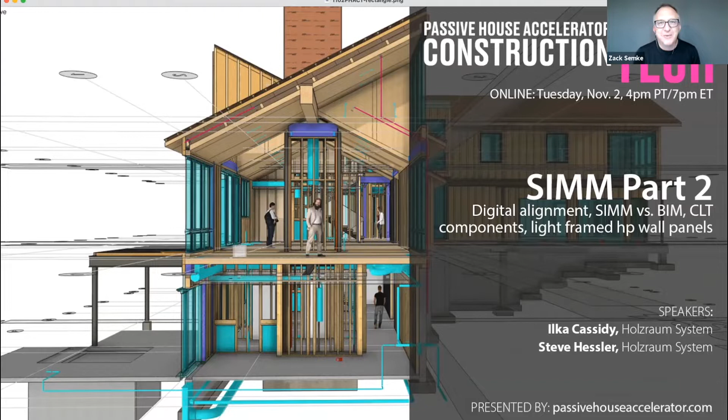Thank you so much, Zack. Really looking forward to tonight. You're in for a treat. If you haven't seen Part 1, we'll let you go now and go to YouTube and check that out. Actually, I wasn't supposed to say that. So backing up, stay with us. If you haven't seen Part 1, it's okay.

So SIMM, right? It's the single integrated manufacturing model. If you're working with someone that's not familiar with that term, please show them this clip, then they'll be familiar. We're really blessed with the run-through we had with Ilka and Steve. We skipped the presentation altogether and just hung out. We got together and talked about what we do and how we do it. So tonight we get to see this for the first time, just as you are. We're going to have comments, you're going to have questions. When those come up, share them with the rest of the audience, because someone else probably has that thought, that comment, or that question. So bring it forward and let's engage.

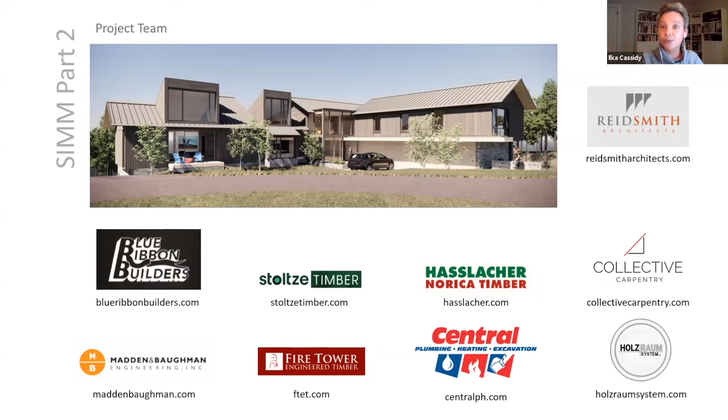This is us. I'm an architect, CPHC, and energy modeler. Steve is also a CPHC, a structural designer, CNC programmer, and high performance builder. And David is a biologist and software designer. I like to introduce us to show that we are coming with a pretty diverse list of backgrounds, which explains to some degree why we are doing what we're doing.

Holzraum System works early on with the project team to align all perspectives with factory-specific construction and prefab preferences. The goal is to coordinate and translate design intent into what will be fabricated and assembled.

We are independent and partner with several manufacturers, and because of that, we had to develop a communication strategy that is actually universal in terms of manufacturers' outputs, as well as a tool to communicate and collaborate with all stakeholders. We call this tool a single integrated manufacturing model, or SIMM.

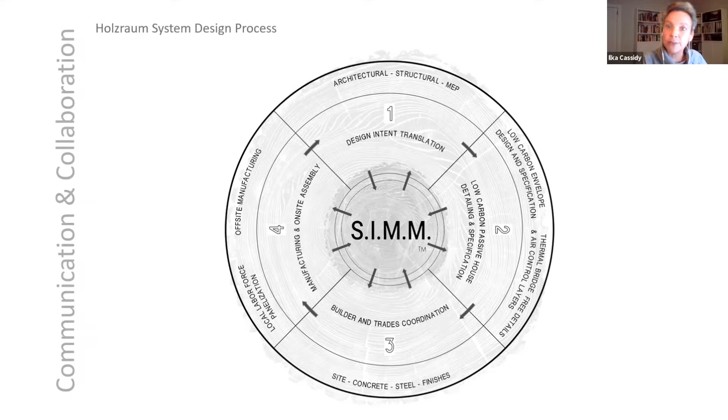The SIMM actually develops into a production fidelity SIMM model and generates panel shop drawings or machine file outputs, as well as raising and installation instructions. The outputs can be used by local labor force to build panels by themselves, or by highly automated factories. Either way, we are part of the team from design development to the end, to installation of the panels.

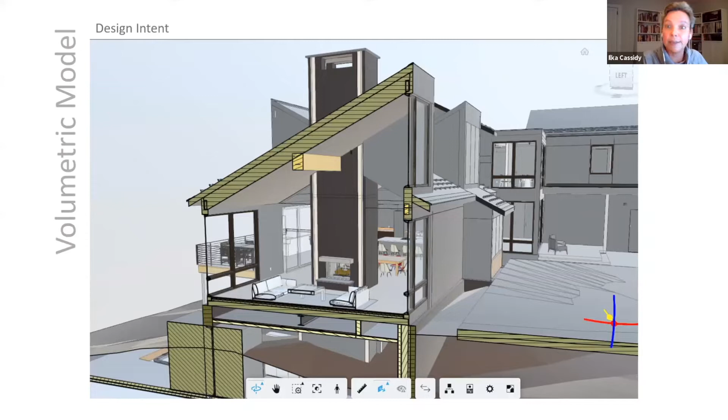To explain this a little further, here is the Revit model that we got from Reid Smith Architects. As you can see, it's great at showing design intent, convey basic construction strategies, and explain spatial relationships. And it is a volumetric model.

These are the outputs from a volumetric model, and they are really great for documentation of plans, elevations, sections, window and finish schedules, and lots of other things. So Revit is great for the architect, right?

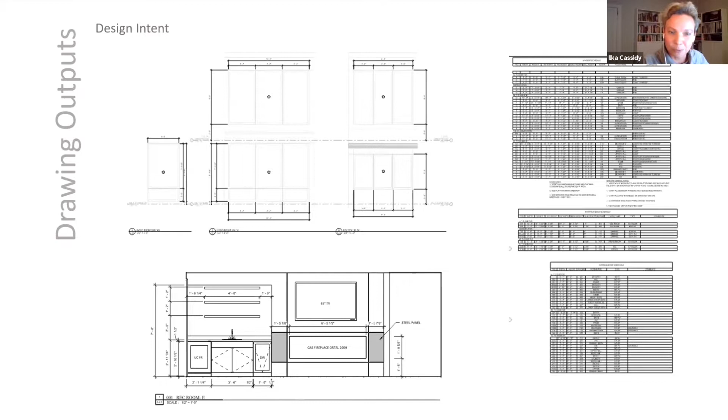And engineers as well. A SIMM, on the other hand, is an expansion of what you need to manufacture the panels. So it's a precise parts-based production model.

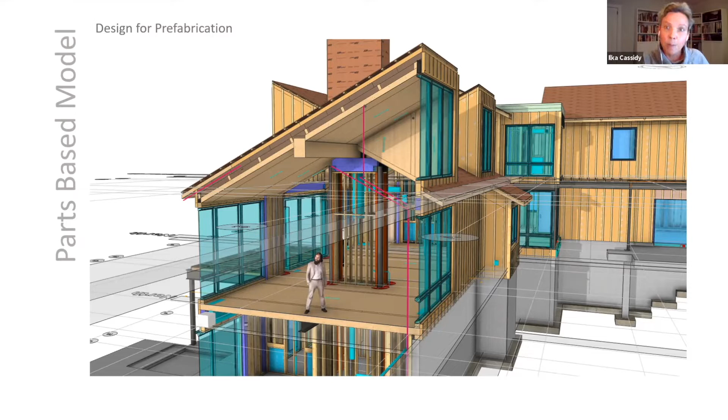In a production model, every element that makes up a panel needs to be identified, modeled, and organized in order to generate these outputs like 2D geometry review set, site prep coordination drawings, installation drawings, panel shop drawings, and in many cases, machine files.

We started thinking that there's just so many lost opportunities in just using this parts-based model for production, because you have to build this model for production. Otherwise, it's not going to work.

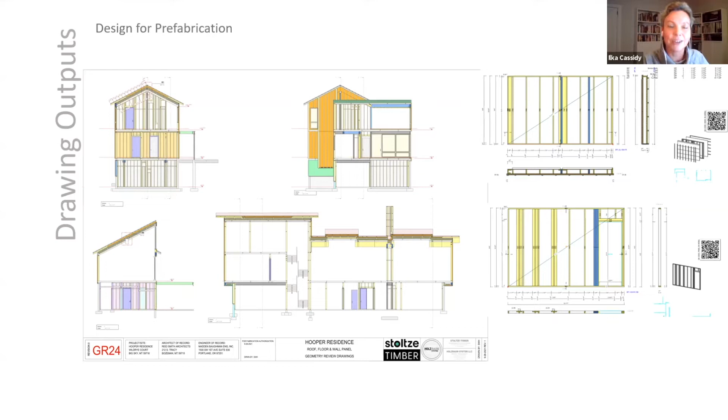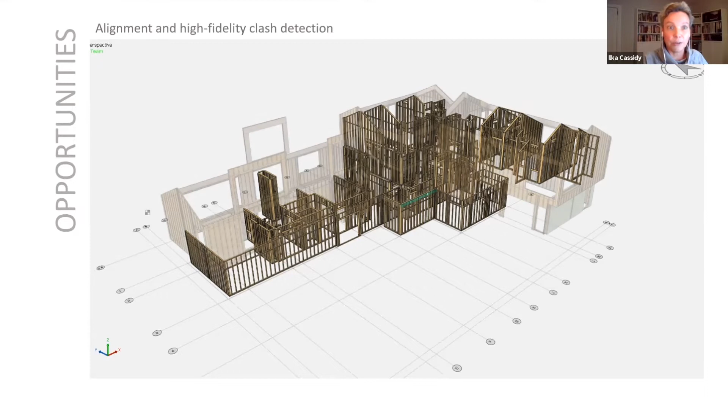So you have this, and this is what typically would be modeled by the manufacturer. In this case, the interior walls, the exterior walls, floor panels, and roof panels.

But since we know that what is being built in the computer will be built exactly according to instructions in real life, we started to include other perspectives.

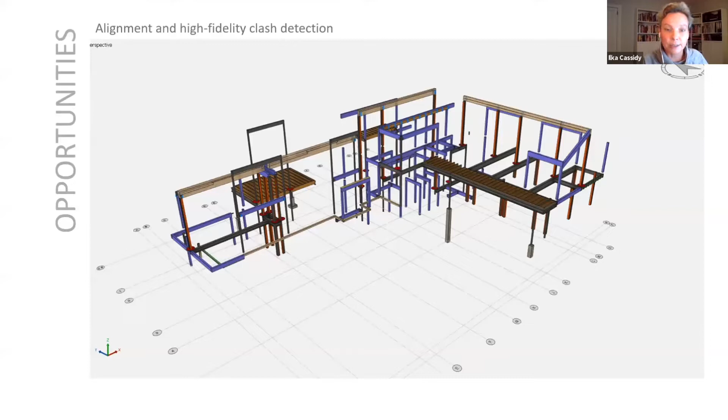So this is the load path, and the Revit model of this was actually provided by the engineer with correct sizing of the members, but it needed to be organized and integrated into the rest of the model. And the same is for the foundation.

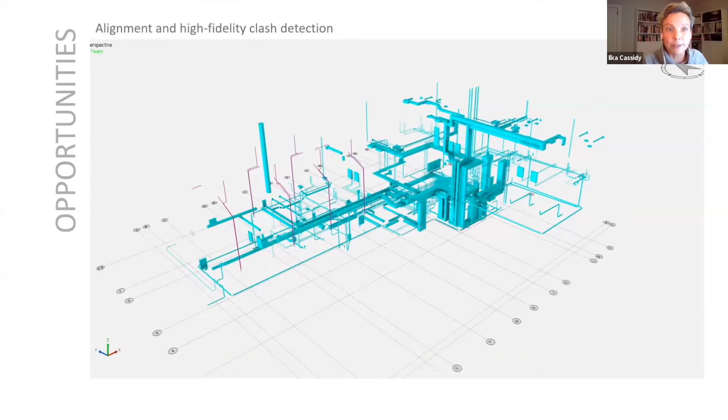The MEP model was also provided by the engineer and could be integrated and clash detected. By kind of running through this with all the other elements, we can check against everything that's being built.

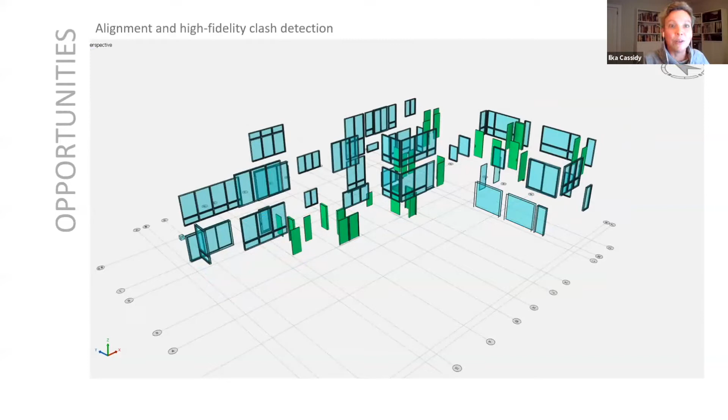And then we also add windows and doors, and this actually came out of the architect's Revit model. We work with the architect builder to integrate them and really detail them out. And this is what we call a holistic parts-based model.

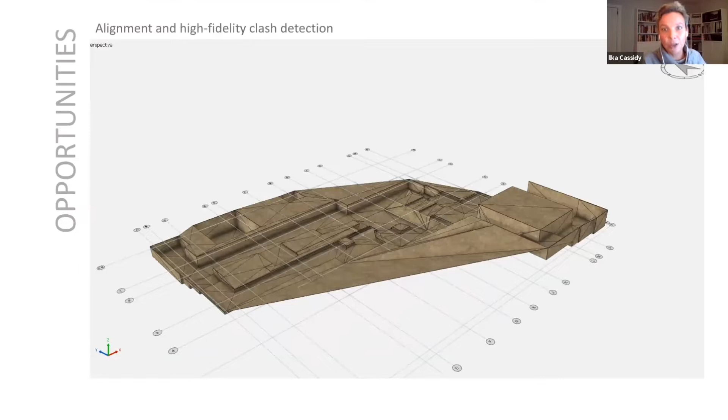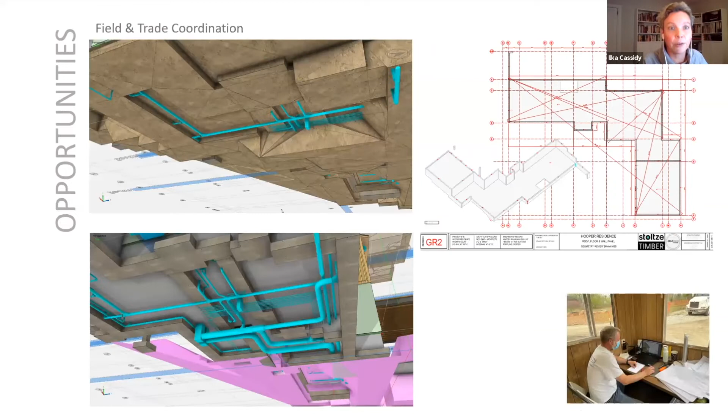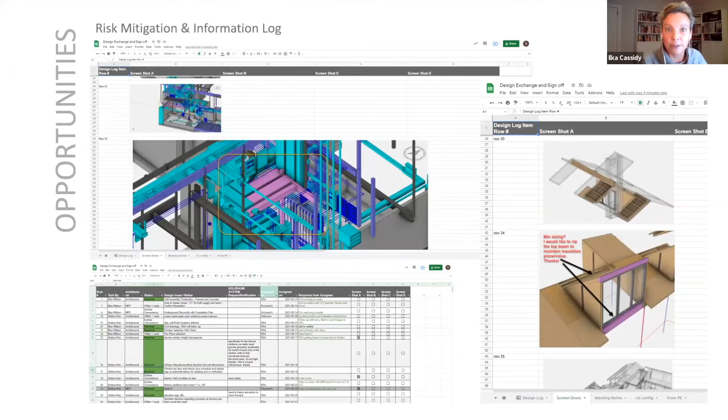In this case, we also were asked to integrate the terrain model, which was provided by the excavation contractor. So we started using the SIM as a communication tool for field and trade coordination, for high performance envelope detailing and instructions. The SIM basically becomes a visual database that feeds an information log, and it has endless possibilities to attach data to each part.

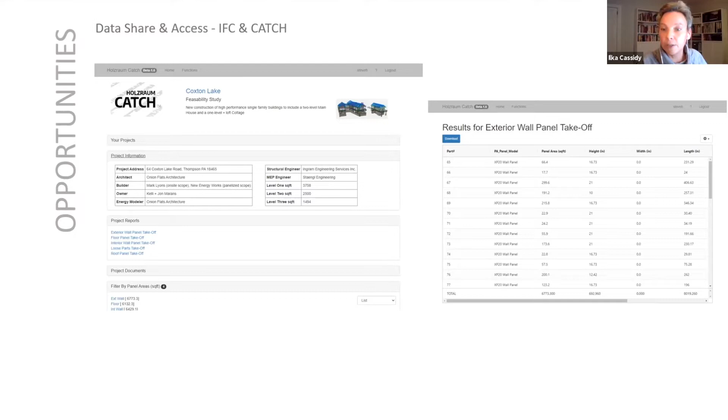And then it can be exported into lists that become available to the builder. Steve is going to talk about that more in a little bit.

So the SIM becomes an accessible database even beyond the building's life cycle, and could be integrated. That's kind of our dream, that it could actually be integrated into the circular use and reuse of building materials, because everything is accounted for, everything is in a database. So eventually, when using sustainable materials is not good enough anymore, we have to use what's already there. There's already a database available where we can see how much of what is there and where it is.

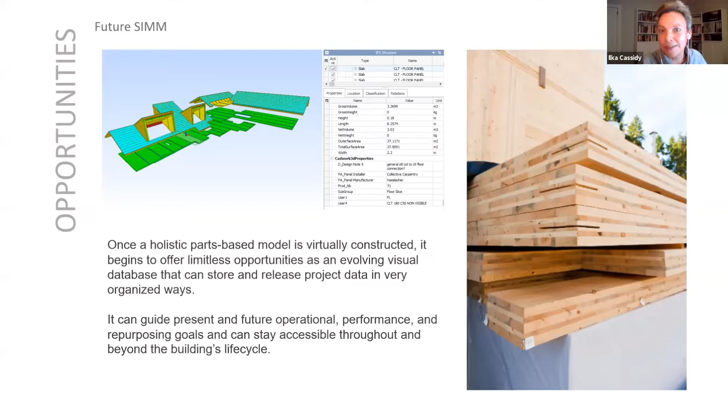So on this particular project, we were really excited that we could develop a true hybrid system, a hybrid of systems coming from different manufacturers, and that we could be the coordinator between all of it. And now I am happy to introduce Pat Clark, who actually built the first commercial CLT building in the United States. He is a walking CLT encyclopedia, and he will be talking about mass timber systems and why we ended up using this hybrid approach. Thanks, Ilka.

So a brief introduction as to who CLT Timber Systems is. We're located in the Flathead Valley of Montana, Northwest Montana, up by Glacier National Park. My company, Wooden House Supply, which has been importing European timber products since 2009, merged or formed a joint venture with a 109-year-old sawmill here in Northwest Montana that owns 40,000 acres of its own timberlands, which has been sustainably managing them for over 100 years. So we formed a joint venture to start to manufacture our own line of what we call CLT 2.0 products here in the Flathead Valley.

Where this all started for me was I had met a colleague through a German contact who actually worked at the first CLT business in the world. It was in southern Germany, in Bavaria, a company called Merk Timber, which is still in business. Not that many folks know that — most people think the Austrians invented CLT, but in reality it was co-invented both in Bavaria and in a part of Switzerland, two separate companies taking two different approaches to this product.

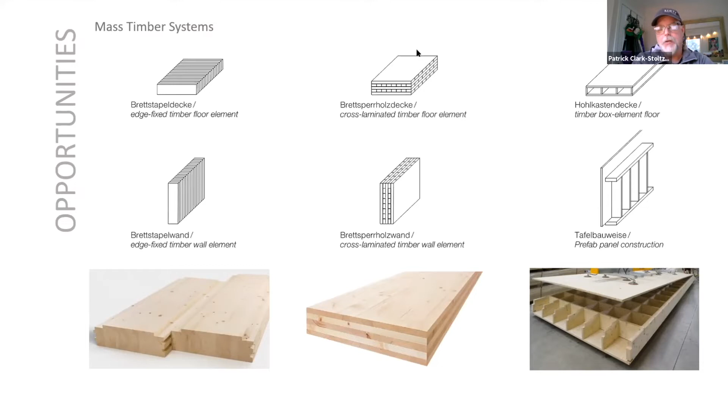One of the other things I wanted to mention is that for you folks in the passive house community, it's quite common for cross-laminated timber as a system to be utilized in passive houses, primarily in Europe to this point in time. But a colleague of mine in the UK actually constructed the tightest passive house ever built in the United Kingdom, and the entire building was cross-laminated timber. So with that, I think I'll hand off to Steve.

So this is the Montana project that we're talking about.

Let's see, so really quick, I'm going to show you some of those components that Ilka talked about that are brought in, either created by Holzraum or many times brought in. So it's content that comes in and goes back and forth many times, sometimes because like for instance the MEP information, you're finding clashes pretty early at a coarse level, and then you're starting to evolve, and the architect's still working on stuff, and structural engineer still working on stuff, and then the MEP.

So it's super iterative, and so for us what we're actually trying to do is figure out, this model is quite huge, and luckily CADWork has this cool feature called Team.

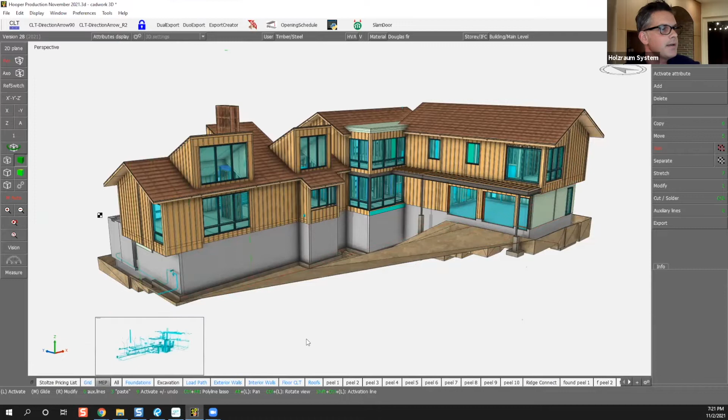So the MEP is actually referenced in. Right now this is actually not in the model. It was in the model for a while, and it was better that it was in the model for a while because it's not snappable right now. But when it was in the model, it was just a beast, an absolute beast, like 800 megs, this model is.

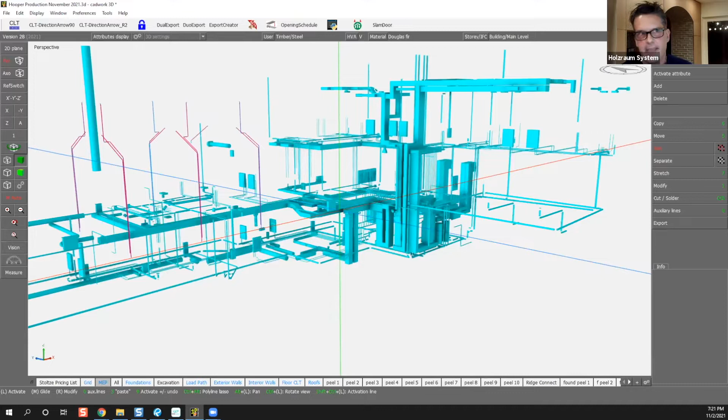But what's really cool is with Team, you can start to break it out into different pieces, which we're going to be doing with Collective Carpentry, who I think Jan might be in the audience, but he's also a CADWork guy. So when we're in production on the light framed panels, we'll be basically working, he'll have his piece and we'll have our piece, and we can update and exchange things.

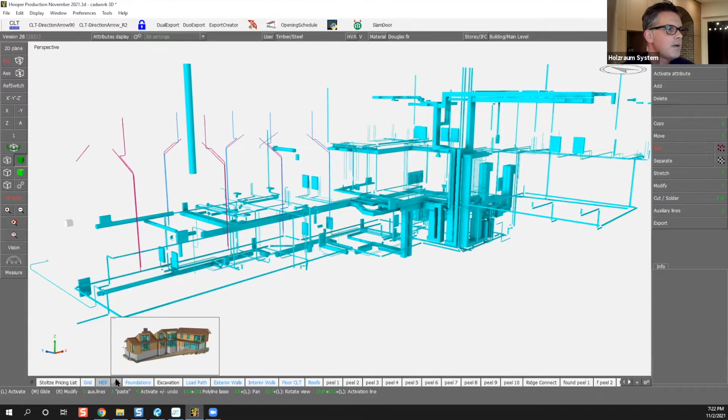So anyway, there's just the basic foundation, excavation model, load path model, all the blue is glulam, and then structural steel.

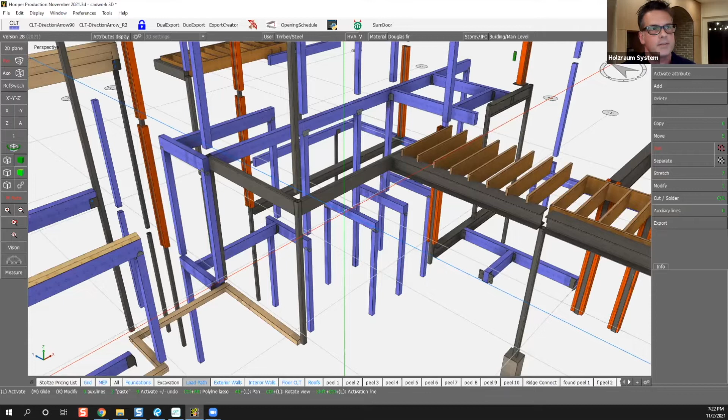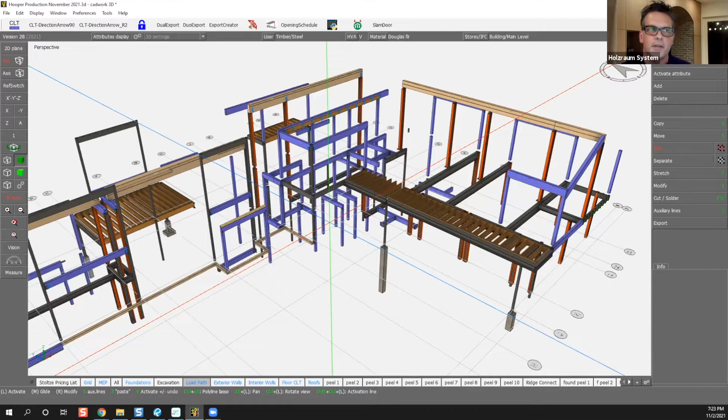There's all different types of sections that were given to us by Tom Bauman, who's going to talk in a few minutes. The structural engineering stuff that came from Bauman, Madden and Baughman was just awesome, because usually it's quite representational from a structural standpoint. First of all, most structural engineers don't hand me an IFC file with all their members - that doesn't usually happen. Second of all, if it does happen, it's almost never sized correctly. So what was awesome is these things were all sized accurately, and I just had to nudge them into the right alignment and location, but it was really, really good.

So we had a lot of back and forth, and then we were able to work through connections together a little bit, but those guys mostly handled most of the connections here, which we're going to get into a little bit more too.

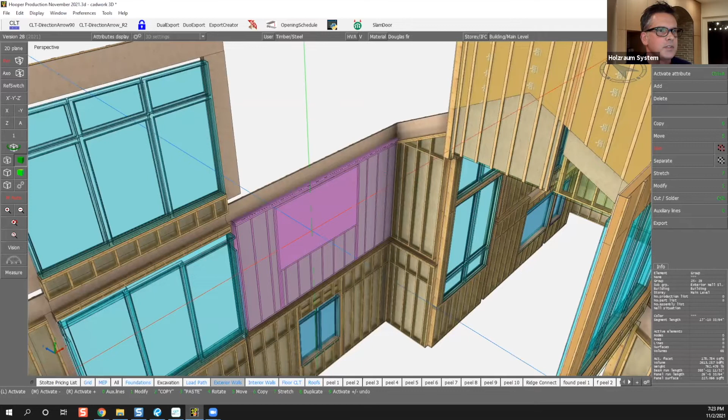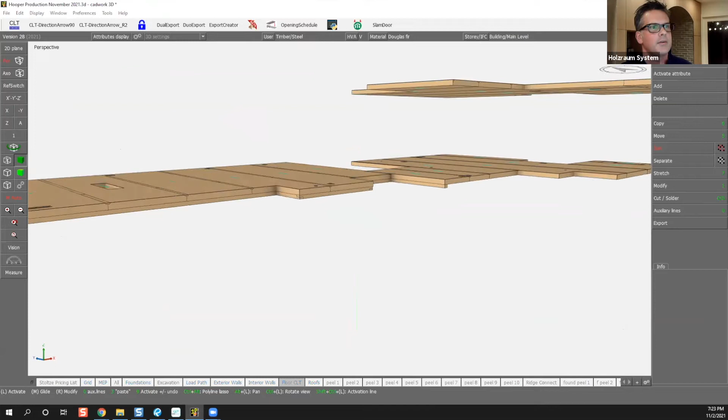And then we have exterior walls, and these all are panelized right now, so that's a panel - you can basically pull these apart, but they're not in their final panel configuration yet, because we're about 2-3 weeks away from handing off for production. Then interior walls, and this is the CLT floor panels, so they're all 180 millimeter, about 7¼ inch CLT panels, with all the penetrations that can be pre-cut if it makes sense. So we work with the MEP on that, and then the roof system.

So what I'm going to do is, before I peel this roof system apart - I'm really excited about this roof system - but before I do, I want to see if Tom can just talk a little bit about their company and what this was like for him. I'll just leave the screen up, Tom, and then you can go ahead and unmute and tell us a little bit about yourself and how this worked out.

Yeah, sure thing, hi everybody. I'm really happy to be invited, and I'm excited about this program today. My name is Tom Baughman, I'm a structural engineer in Portland, Oregon. Our company's been around, I've been practicing for about 25 years, and this company, Madden and Baughman, I think we're in our 16th year together.

We work on a pretty wide variety of projects, commercial and residential, everything from custom homes like this to some fairly good-sized multifamily projects. And like a lot of people in the area, we feel like we're pretty tuned in with wood construction, but there's a lot of really exciting advances that, just like all of our competitors, we've been very interested in getting into. We're kind of pleased to see some of the mass timber approaches, for example, becoming more cost effective as we all get better at doing it, and as there's more and more supply in the market.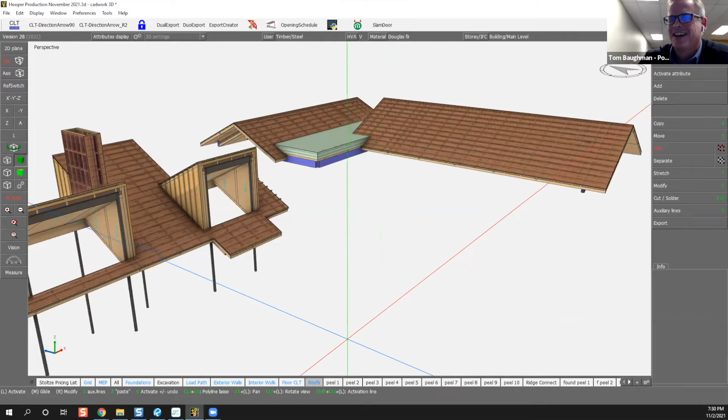No, it's actually really true that the collaboration has been just insane, and it's a bummer that Eric Renna from the MEP company couldn't be here, because Tom and Eric and Matt Schaefer, Tom's engineer, the project engineer, it's just been awesome. It's hard to get people to put in sweat equity like this, you know? Tom and Eric are putting a lot of time up front, and it's a weird thing. Tom probably was like, wow, this is a lot of time we're spending, but he also realized early on that it's way better to put this time up front.

Instead of it being very difficult to quantify change orders and delays, and sometimes really scary stuff that can happen if you don't think it all through. So anyway, I'm going to show you an example of one of the collaborations that Tom and I and Matt worked on.

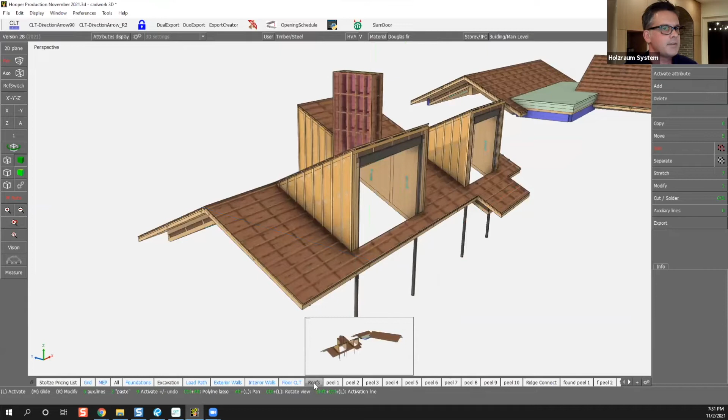So this roof is cool. This is a thermally decoupled 3-foot overhang, and the snow loads for this building are 160 pounds a square foot. Just take that for a second. Think about the last time you designed a 3-foot overhang for 160 pounds a square foot.

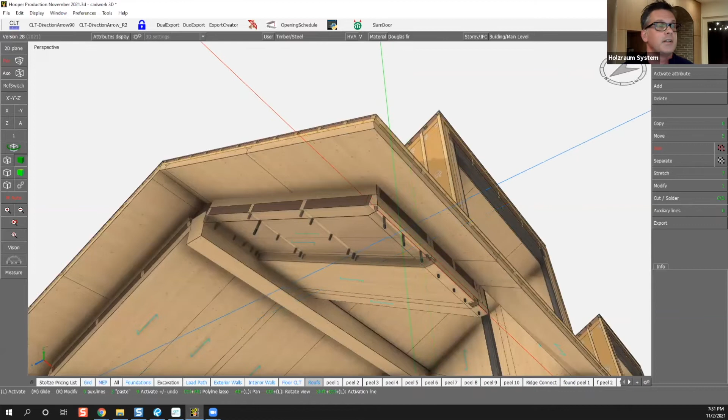And the entire overhang is actually happening with this panel right here. This is what we call a static panel. But the static panel would be a tremendous thermal bridge if we didn't decouple it. And Pat Clark actually led the way on how he's been doing this for a while, and then we kind of took it up another notch.

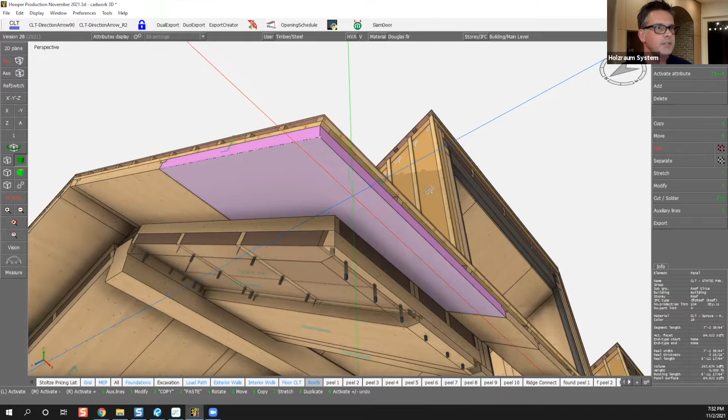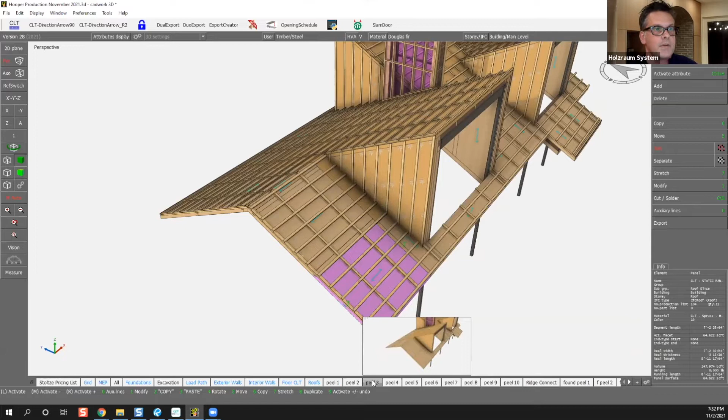But basically, if I peel this thing apart, we've got on the top 5/8 red zip. Take the red zip off, there's 2 layers of battens. The first layer is a 2x4 flat, and then there's a 1x on top of that, cross ventilated. And then I take the battens off, and these are the static panels. So all the static panels are here for the building.

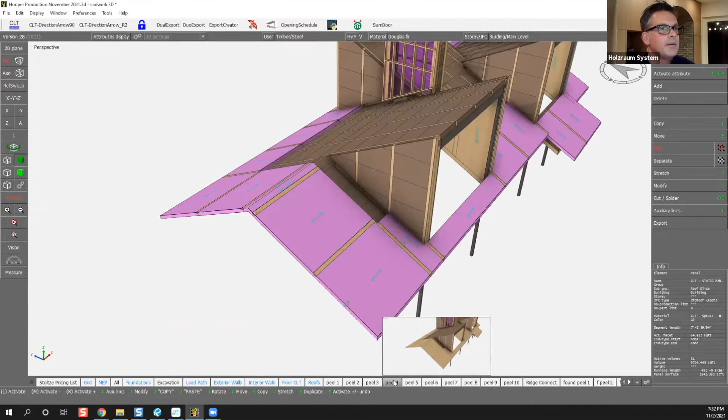So they're handling all of the overhangs. But what's nice is they work out level and flush with this kind of top layer of Steico insulation. So next layer down, you can start to take the static panels off.

This is the buildup. This material is just like KVH material. It's awesome, going to come from Hasslacher. Everything in this view is going to come from Hasslacher except for the insulation. But this whole system of battens is going to be a pre-cut, numbered part kit, and I'll get down where I can show you the part that's really exciting.

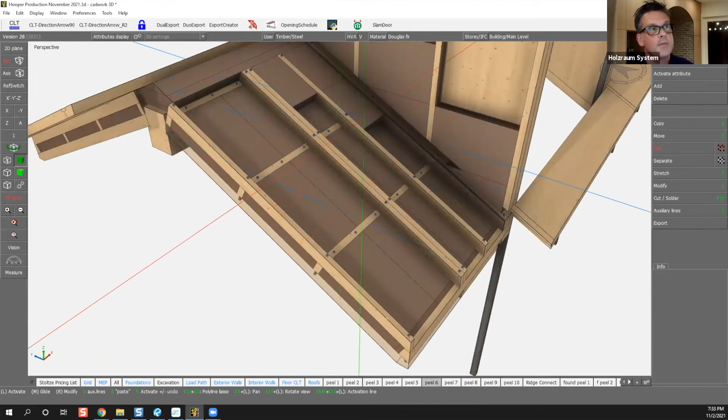So the way this works with collective carpentry is, this is Steico Therm. Okay, let me go back. This insulation right here, this is Steico Universal Dry. This is what Ilka and I use on our light frame panels out here. And this is also what collective carpentry, Benson Wood, and New Energy Works are all drinking the Kool-Aid on — this amazing exterior insulation.

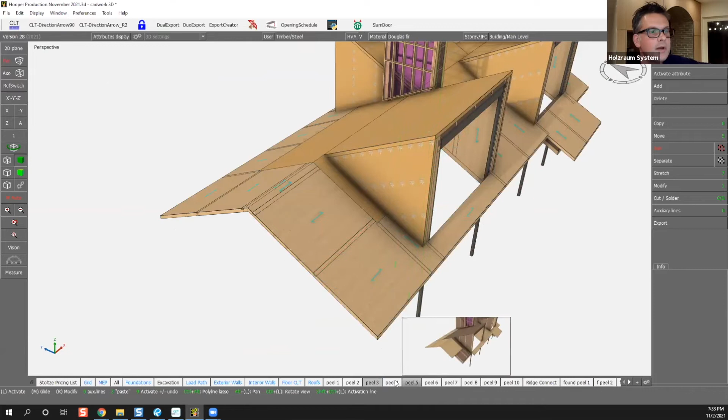Because you can walk on it, it's waterproof, but it doesn't have quite the same R value. So what Pat has taught me is that you use that on the outside and then you use this stuff on the inside. It's like a 3.7 per inch, and it's cheaper, but it's not tongue and groove, so it's excellent behind the other insulation.

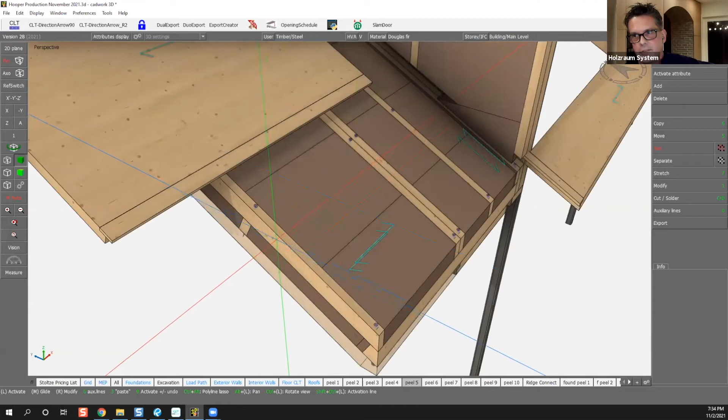So we basically designed the spacing to handle structure — all the spacing of this KVH build-out is thermally decoupled and spaced on European delivered sizes. This panel is basically going to be cut in two out of the container, and collective carpentry is going to pre-prep these. There's going to be a shop drawing for the installation so that when they come, they can just pressure fit and drop it in place.

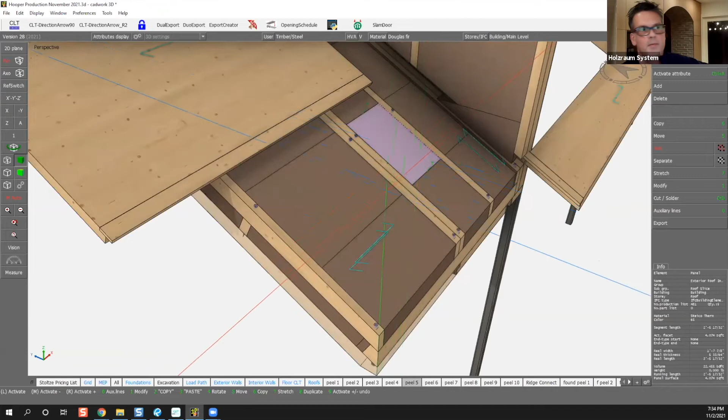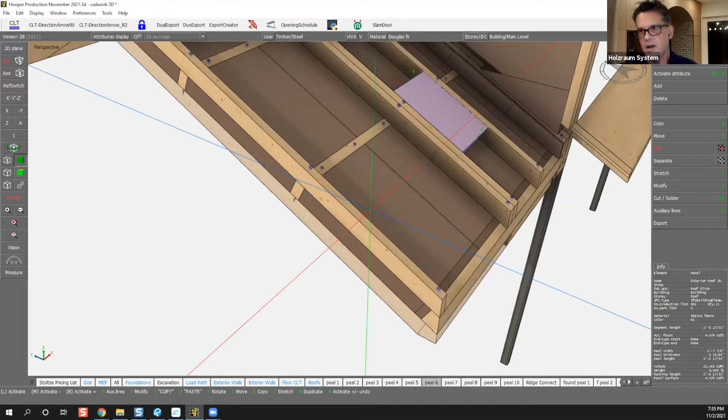So if we keep going down here and take out some of the insulation, you can see this basic cross of KVH material. The KVH material, by the way, is cool — it's like glue-jointed, almost like a piece of glue joint trim, but super straight and just as strong as solid. And when we build it into this whole Holzraum package, it's actually cheaper than solid timber. So it's crazy — it's kiln dried, dead straight, and cheap.

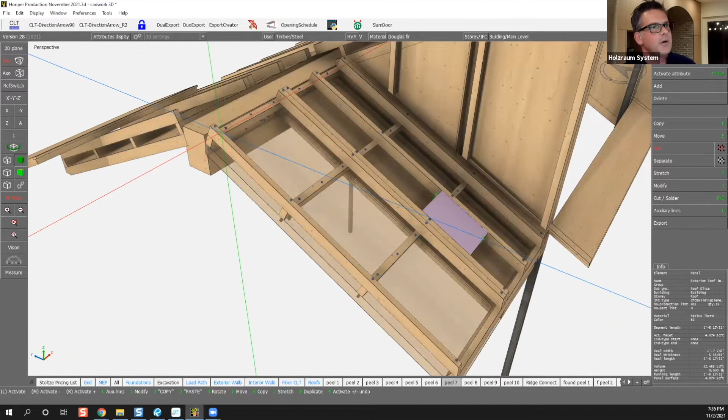So, okay, you figure it out. So then we go a little further down now. And now what I wanted to show you is the cool level of fabrication that Holzraum is going to do. So what we did is, if I make this guy a little bit transparent...

You see the fasteners — these are all Rothoblaas fasteners. With Tom's help and Pat's help and Fire Tower, we're basically finding the most cost-effective, optimal fastener through the massive Rothoblaas catalog.

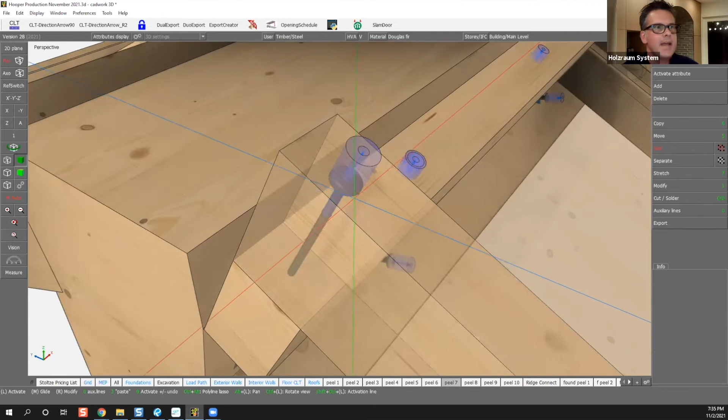And attached to the fastener, there's a pilot hole. You see this little cyan guy right here? That actually has the name and product info on it. This fastener, the gray one, is just a design fastener — it's there for us to communicate, for Tom and I and Matt to put it on drawings and understand what we're looking at, to have the parts in our hands. But this little guy right here takes up way less memory and has data attached.

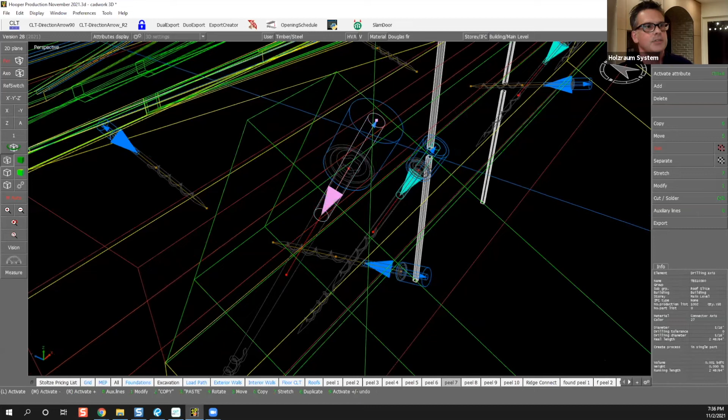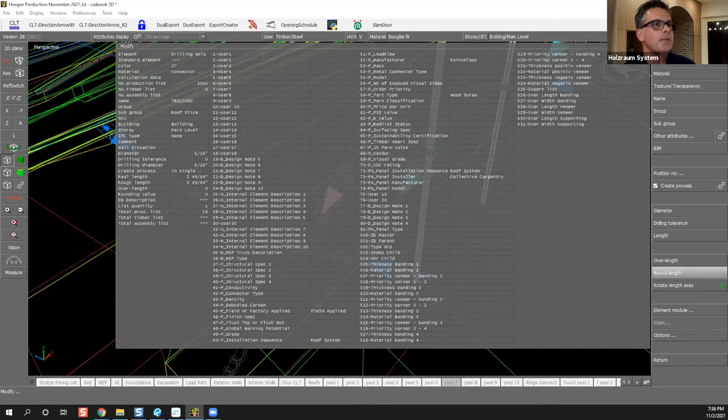So right now, if I look at the data, I could fill every single one of these attributes if I wanted to, but the main things I have are that this is for the sequence roof system. It will be installed by collective carpentry. It is a Rothoblaas part. And it is a TBS 10 millimeter by 360 millimeter. So basically that one part carries all that data.

And what's cool is what Holzraum is going to do for us — you see the little blue one is a countersink, it's only a half inch deep, so the countersink is going to get milled. And that tiny part that's only about 2 inches long is a tracking pilot hole.

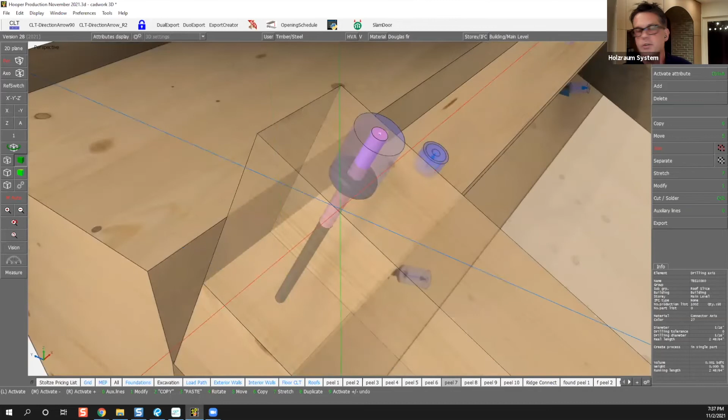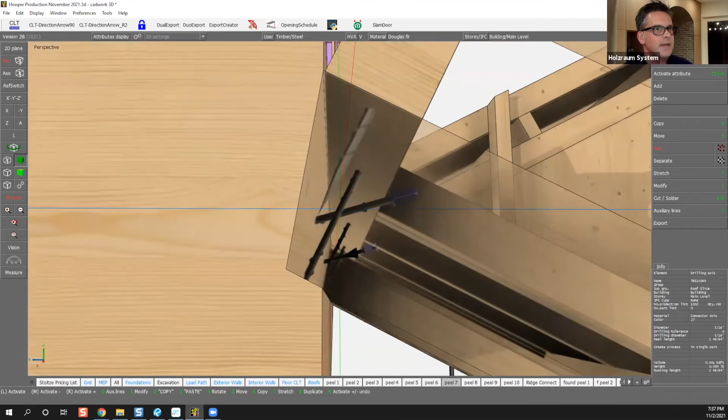So that means that when the guys are on site, they're not thinking at all about drilling holes — they're just sticking screws into pilot holes, and it'll track perfectly because the angle has to be dead perfect. This fastener is designed so that if you poke through it and they went the wrong direction, they'd put a hole in the bottom of this very visible CLT roof that is their living room — we're screwed. So we can't have the screws screw us. That means we're relying on the manufacturer to make it easy, but also dead-nail the placement of every screw.

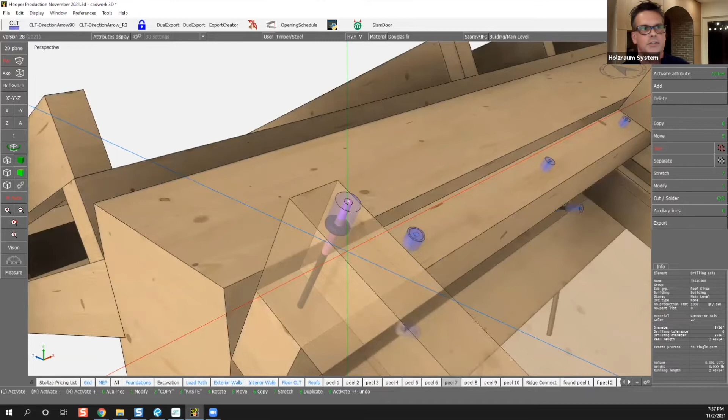The cool thing is that because we have it in a BIM model, every time we put a part in a model, it's basically a little bank for data. So this whole thing is just a ridiculous visual data bank.

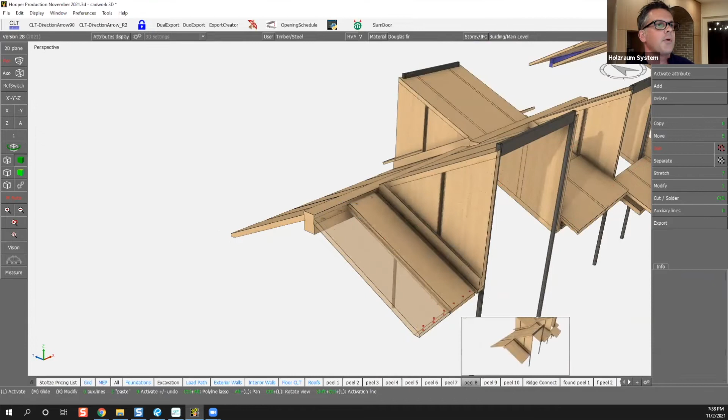This is all part related. This is Tom's connection, I love this. We were going to do this crazy steel connector, and we spent a week designing the wrong thing that Pat and I started on. Then Tom's like, why can't we just do a haunch like a timber frame? And I'm like, oh my God, I love a haunch.

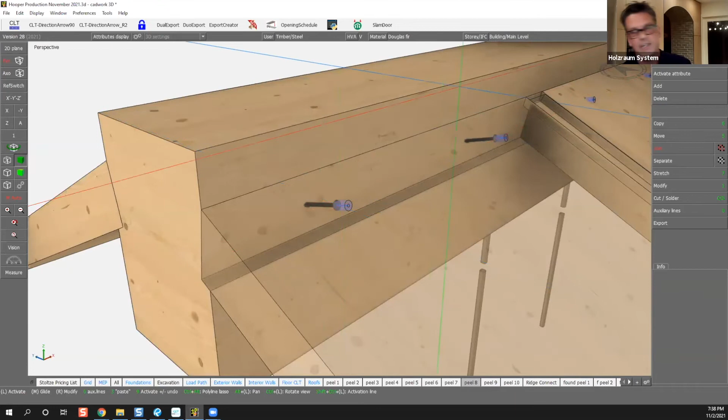So that's basically what Tom did. Then Tom went and looked at the fasteners and found one we didn't even know exists, and he cut the fastener frequency in half. So he saved us money on fabrication of the hangers, he saved us money on installation of the hangers, and these screws aren't cheap either.

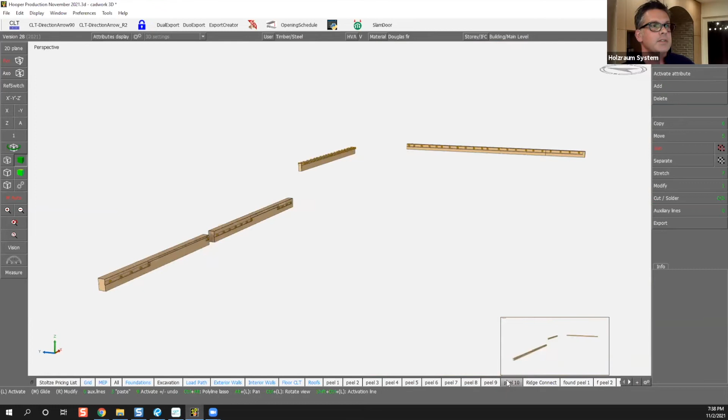So what this thing looks like with these haunches, right? That little tiny thing is 1 inch deep, and that's carrying the entire CLT roof with the right fastener. It's crazy. And what it looks like when you take all of the parts out is this.

So this is what will get machined. These ridges have these pockets, and these are not just structural, but literally, that's the visible joint right there. So it has to be tight and clean and perfect, but we feel really confident that that's what will happen.

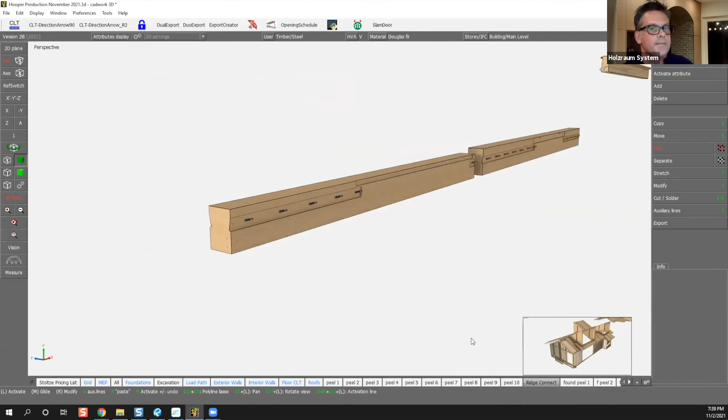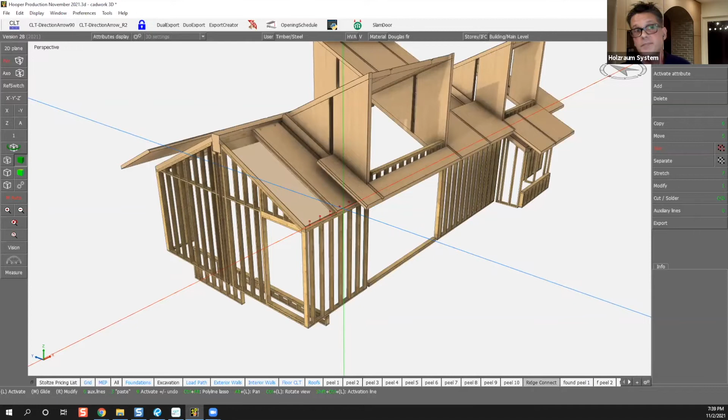So then the other couple things, this shows the CLT structural members, really pretty simple stuff, right? It's all just Rothoblaas fasteners. We're trying to keep things as simple as we can as far as connections. Sometimes the connections have to get a little wacky, but a lot of the CLT stuff is pretty straightforward as long as you've engineered it out.

So that's the roof stuff. Now I'm just going to show you a couple other little things about the model. So if I'm going to peel it back, I'm going to build it back up.

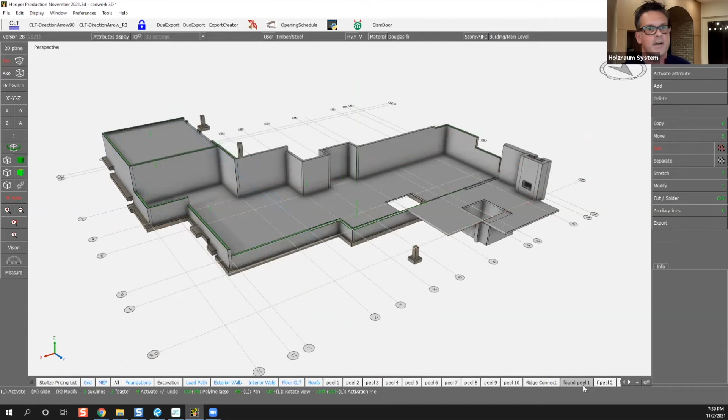Foundation detail, with a treated sill plate. We went back and forth a lot between the architect and Tom and Matt and I, because there's a lot of steps and things in here. And then this is all Tom's load path, Tom and Matt's load path.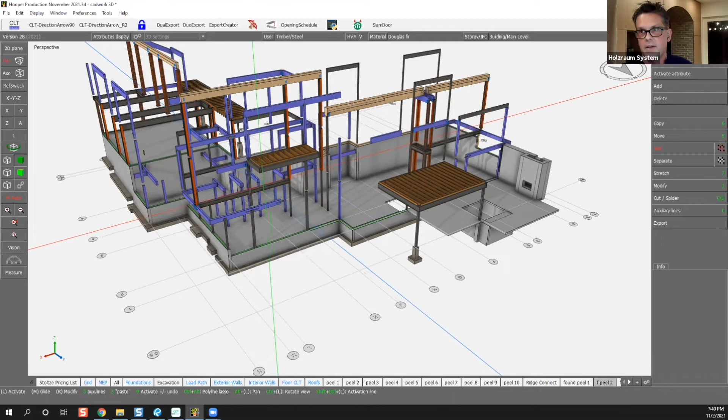So there's very tight tolerances, because what's going to happen here is Collective Carpentry is coming from British Columbia. They're going to be down on this site in Montana with CLT from Austria, and they're going to provide these glulams with the joinery and the holes for like 3/4 bolts. So the coordination between this and the structural steel has to be pretty damn good.

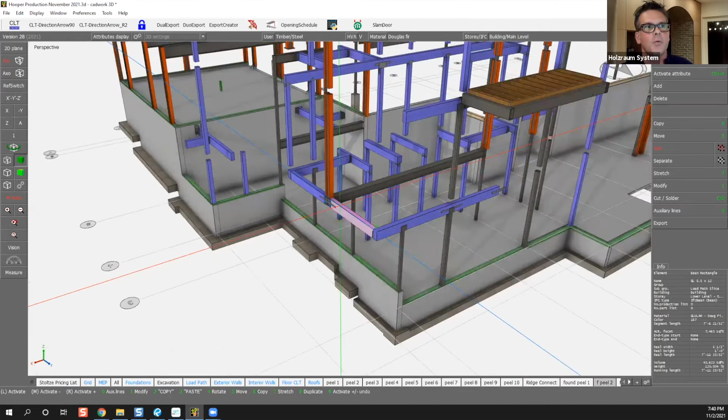You can always say, well, I'm going to drill those when I'm getting down there, but it is a time suck to do that, and it really can burn your budget. So we're going to try to do as much prefabrication as we feel safe about.

Let's see. So now we're bringing in, this is the load path with now the CLT floors. So you can kind of see what that looks like. And now I'm bringing in some interior walls, all the light frame, and this is all panelized as well.

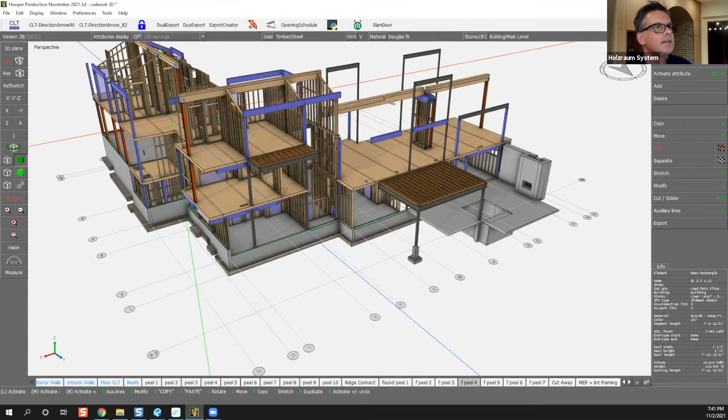You can see these weird rough openings. You're going to see that's all MEP. So there's rough openings for doors, but there's tons of rough openings for ductwork in this. So that's why Tom and I had to really rely on Eric Renna to keep updating the MEP model, which he did a brilliant job with. And you can see how that works.

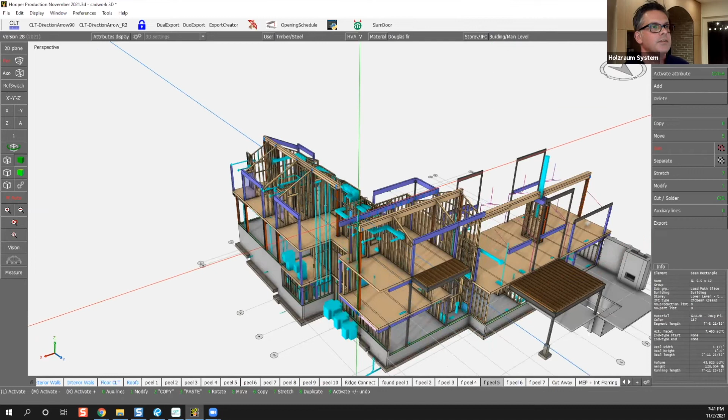So basically all the framing, I don't actually even know how you frame these walls and put the MEP system in manually, because when I was a carpenter, we didn't have MEP that looked like that. But I honestly don't really know how you do this cost effectively. I don't know how that happens actually.

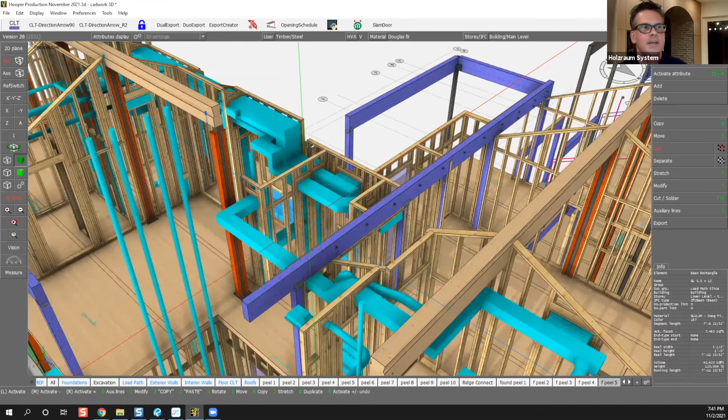This is the first project where usually our MEP coordination is through floors and roofs, but this is the first one where the walls had such intensive MEP coordination. So that's going to be nice.

And then bringing in the exterior walls and then the roof panels. And that's sort of most of the building.

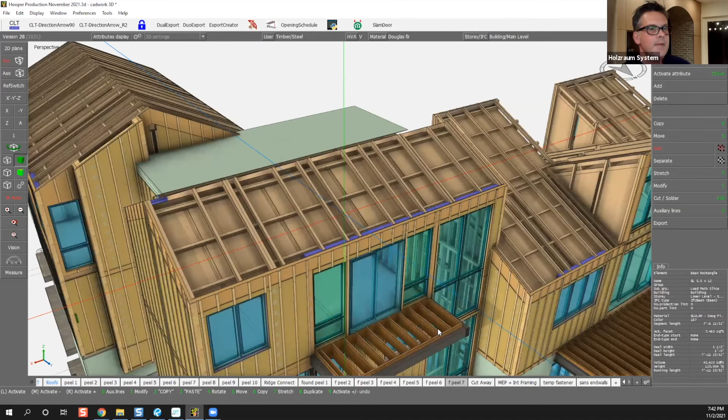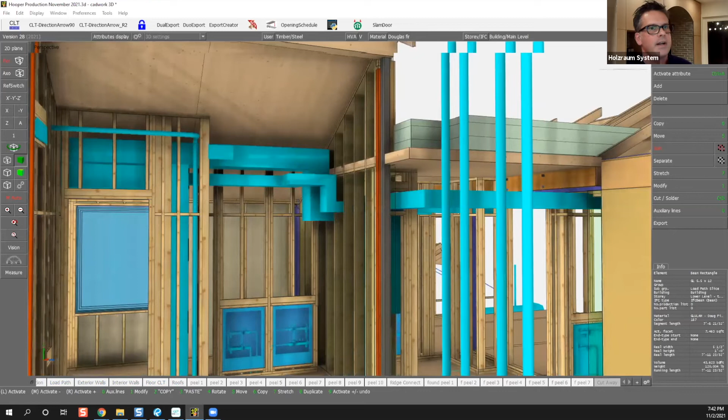I did this so you can just see, I just cut away the exterior walls a bit so you can see how having all those parts makes this really useful in meetings. So when we have coordination meetings, we look at the Revit models, but when we want to look at what's really going on in some of these spots, we can just turn on anything we want and get a little better look at things.

This is the interior walls, just interior walls. It's really nice to be able to turn on certain scopes and perspectives against other scopes and perspectives, really zero in, and then bring it all back.

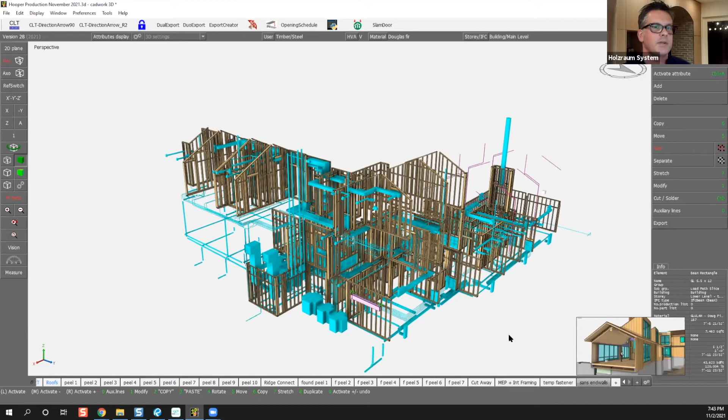So yeah, that's pretty much it. I don't know if anybody has anything they want to see in particular before we start doing question and answer. If anybody has anything they want to look at, I can always bring it back up. Should we just move into a Q&A?

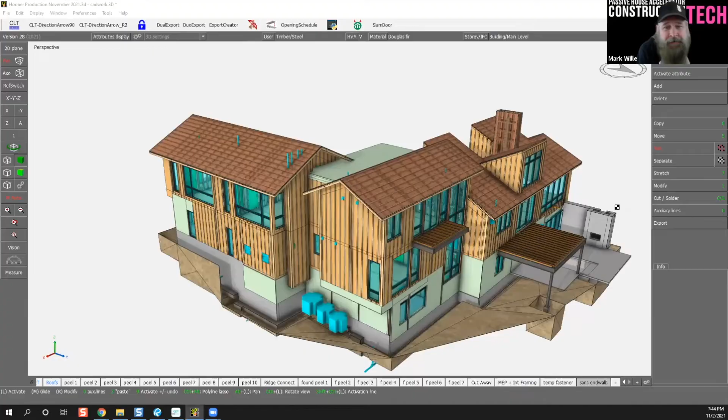This is one of the reasons why this program exists: technical, technique, and technology. If you didn't see those three things, it's because your eyes weren't on the monitor.

Holy cannoli, Sean, what are your words for this? Part one was amazing, this one is just a whole new level. Sorry, I just picked my jaw off the floor because this stuff I love, but this is a whole new level. This is the stuff I've been dreaming about. I've seen it in Europe, I've seen it in other places, but now to see this starting to get pumped out in rhythm with you guys, it's beautiful stuff.

So Shannon, should we dive into a few questions? Hey Sean, I actually realized there's one quick thing I have to show you, can I do that? Sure. I totally forgot to show you this crazy program my brother's developing for us. Yes, and it's all related to the project. So I was just going to say, Steve, yeah, if only there was a catch program. I just got caught up.

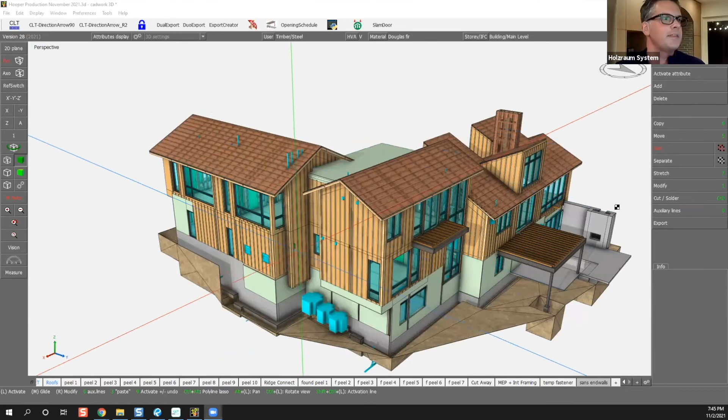All this data, yeah, so check this out. Okay, remember I told you about the data, right? Let's just take this apart, let's go find one of those fasteners. And while you're looking for that, maybe you or Ilka can describe what it is your brother does again and why it matters so much.

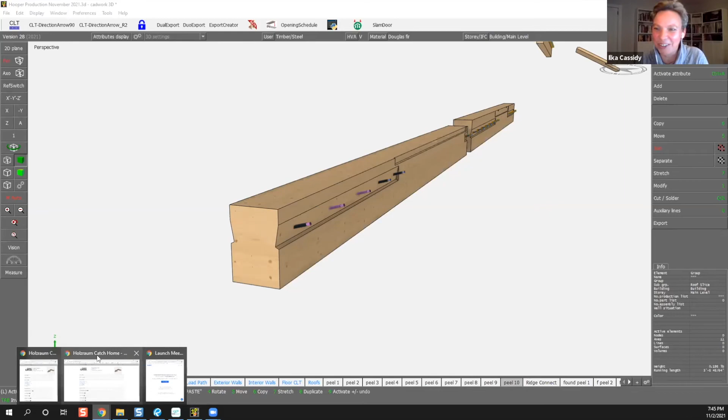Well, he might actually be in the audience. David, are you there? David, are you there? He is, but he's muted. He might be having a moment. So we'll wait for him to come back. Okay, why don't you let me show you this, and then you can, and then I'm going to be done, and then David can jump in.

So we have all this data, right, and we can export, like cadwork, crazy awesome, you can export all these lists. But for years and years it was always challenging because you pump out a list for bolts, right, and you pump out a list for timbers, and you pump out lists at sales level and at development level, and it's just lists all over the place. They have these cool tools where you can save list settings, but I'm telling you, it's a lot to manage. So we needed something that would do it all in one place.

So we pump out a list at probably three different stages of the BIM model development. This one is our first foray into the production model. Collective Carpentry, Stoltz Timber's already using it for ordering, Haaslocker will use it, and then the guys in the field will install with it.

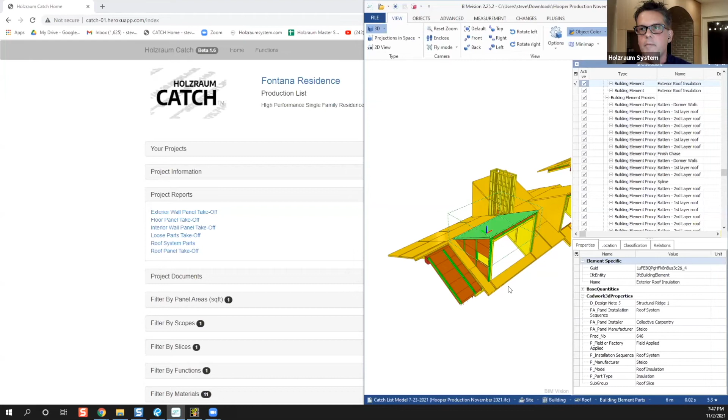So this is Catch, basically, these are different projects we have in here. There's project information, and then there's all these different types of reports. We also upload an IFC file of the project, so if you don't have cadwork, you can get a free BIM viewer and see it right here. Every part in the model has the production number, so this is production number 646, and it matches everything in here. So if I wanted to go look for part 646, it's all in Catch.

So I can filter by names. Remember I was looking at all those Rothoblaas fasteners. If I'm in the field or ordering and I need to know about all the TBS8, this particular fastener, I now have all of those in front of me.

If I want more information, I can turn on different columns. I can move the columns. I can sort right in among any of these.

So let's go back here. I'm going to go to like roof system parts. This has all the parts that are in that roof system. So now if I want to see only the stuff that's insulation, I can filter, and now on the screen it's just insulation.

And then I can basically go down here, click download, and it took a second and a half, and now I have a CSV file of that report. So I can make all these different reports whenever I want.

I can use this on a laptop or on a phone. And that way I can basically just get my hands on that data very, very quickly.

David's probably like, you're not doing a good job of saying all the things it does, because it does a lot, but I'm still learning it actually.

So anyway, this is the back end of the BIM model. This is where we're starting to figure out how to access it very quickly and let the users -- for us that's the panel companies, the builders, the installers big time, and the designers to some extent -- they all basically have a license to get in here and use that data navigation.